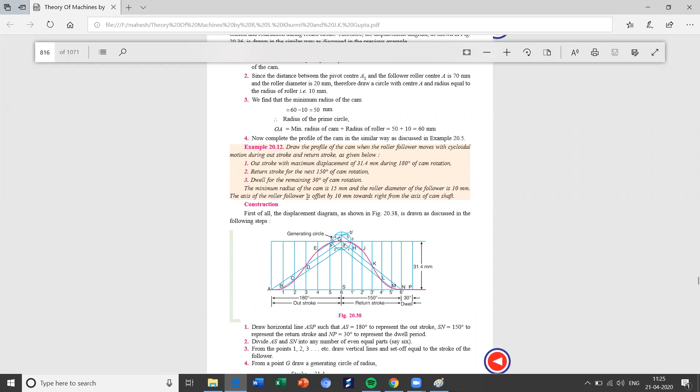Yes sir. Okay, so here you can see the outstroke is maximum displacement. It is given 180 degree. Return stroke is 150 degree. So dwell is 30 degree. Likewise they have mentioned it here. You can see the various problems. You can see here, the same problem.

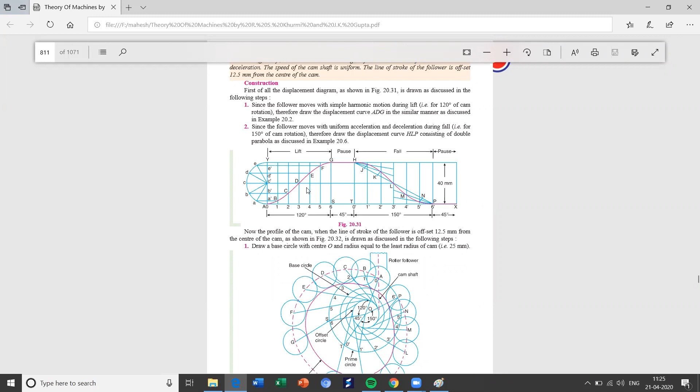This is the problem, but only I have changed it. Same problem, you can see the simple harmonic motion and UARM. I have changed my angles because I have taken one problem from the question paper, previous question paper. So here also they have mentioned: angle of lift is 120 degree and angle of fall is 150 degree.

And lift of the follower is 40 mm. Such kind of thing they have given. Here you can see number of pauses are 2, of equal interval between motions. So likewise, they will not be mentioning how much is the dwell angle.

See here, you have to count it first of all. Here it is given that angle of lift is 120 degree and angle of fall is 150 degree. So 120 and 150, it makes how much? It makes 270 degree. Out of 360 degree, how much is remaining?

60 and 30, it is 90 degree. 90 degree is remaining now. Now what it is saying: number of pauses are 2. So 2 pauses are there, correct? Of equal interval between motion. So whatever pauses they take for a certain angle, it will be divided in 2.

So what are those? We already know 90 degrees remaining, so you have to divide it in equal number, that is 45 and 45. So here you can see the 45 first dwell period and the second dwell period is 45. These you have to make out. It will not be mentioned in the problem, they will just be giving the sentences. You have to make out how it works.

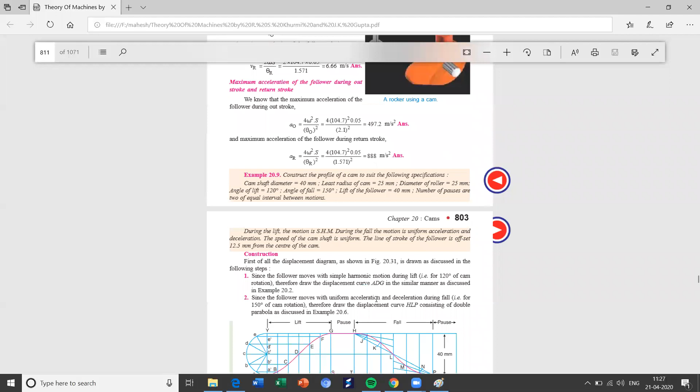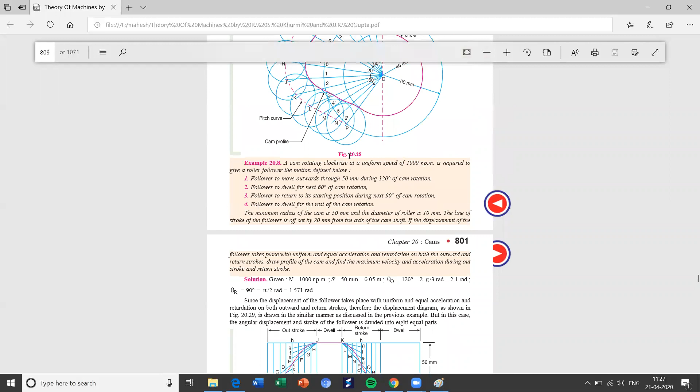Next, you can see here again in this problem: outward 120 degree, again 60 degree, this is 90 degree. See here it is given clearly that 60 degree dwell for the middle portion, it has been mentioned. The next one again 90 degree, it has been mentioned, and the follower to dwell for the rest of the cam rotation, here also it is mentioned.

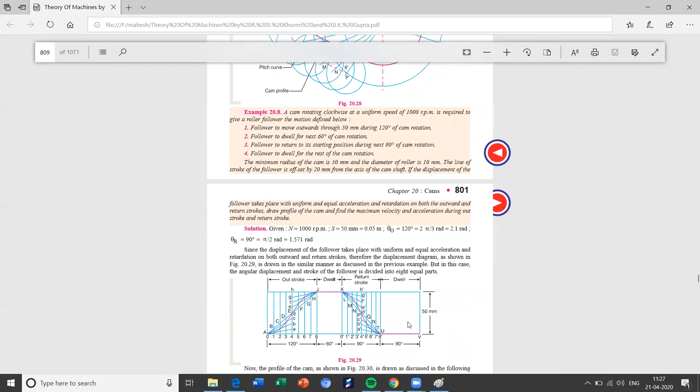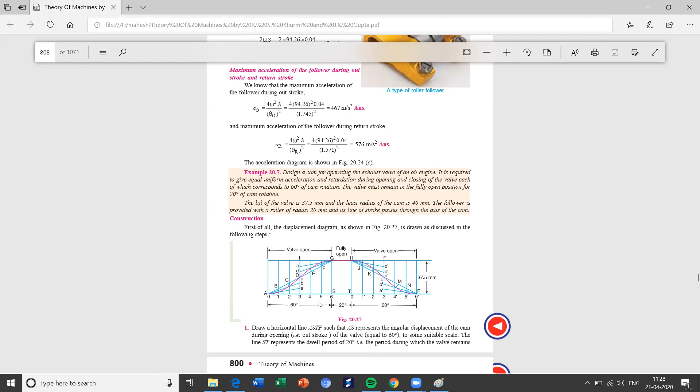So here already it has been mentioned that for opening and closing, each corresponds to 60. So 60 plus 60 is 120, and the dwell period they have mentioned as fully open position, that is 20 degree. So now, next one, you can see this problem. There are various kinds of problems.

So particularly what I mean to say, here you can see I have taken this problem in the question, but they have mentioned that... sorry. So particularly what they have mentioned here in the problem is that the lift or the angle of rotation, they have precisely mentioned angle of

outstroke. It is given as 1 divided by 4, 1 divided by 4th revolution. They have given it like this, they have mentioned. And here they have given the next thing. But I'll just clear this. Now if they have given it like this, 1 divided by 4, revolution of 1 divided by 4, that is nothing but, or they will be giving, is pi divided by 2.

But if they told pi divided by 2, you will be able to make out. So how they will do it, it is nothing but 1 divided by 4.

If they give 1 divided by 4, what you have to do is nothing but the full cam rotation takes place for 360 degrees. So it is nothing but 360 divided by 4, which will give you 90 degrees.

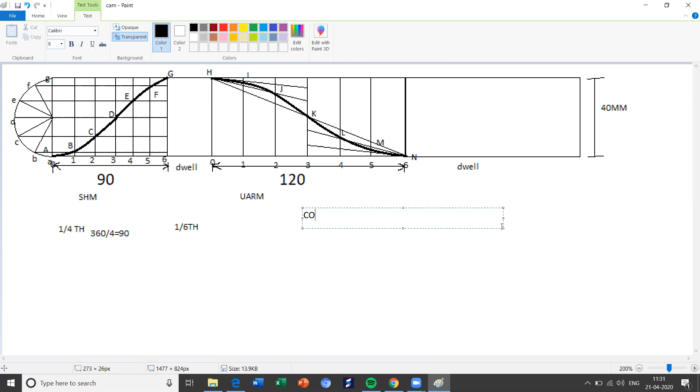Every time whatever questions we have solved, the direction of rotation is given as clockwise. Now here is the trick. Whatever direction we have solved till now is clockwise. So now if clockwise is given in the problem, but in what way do we actually solve it? We have to go anti-clockwise.

As you can see in the previous problems, we have solved it in an anti-clockwise direction, correct? I'll just show it once again here. You can see here 0, 1, 2, 3, 4, 5, 6, so we are coming like this, from the right side to the left side. That means this is anti-clockwise we are drawing.

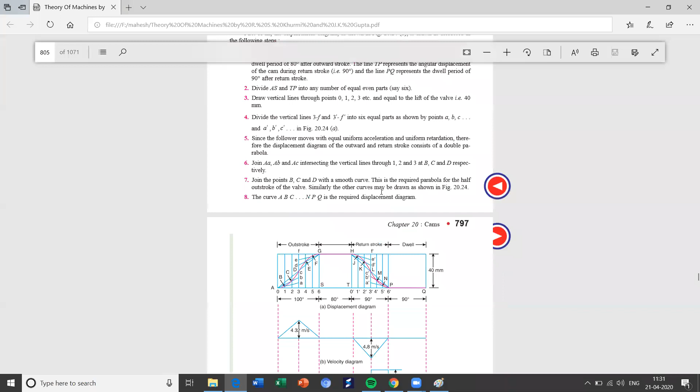But the problem states here, it may be mentioned, 'rotating clockwise at a uniform speed.' In every problem they'll mention clockwise. So just remember, if clockwise is given, you have to draw like this, following the same procedure. That means it is actually anti-clockwise we are drawing, but we have to follow that rule.

But here now, I have taken one question paper from 2008, and again in the question paper of 2012 or 11, something, I don't remember properly. In those question papers, this anti-clockwise question has arisen 2 to 3 times.

So now I will make this question as anti-clockwise. We have to solve it by anti-clockwise, meaning already in the problem it is given, it has been mentioned, you can see here in the problem it says anti-clockwise. So what do we have to draw? If it is mentioned as anti-clockwise, then we have to draw it in a clockwise manner.

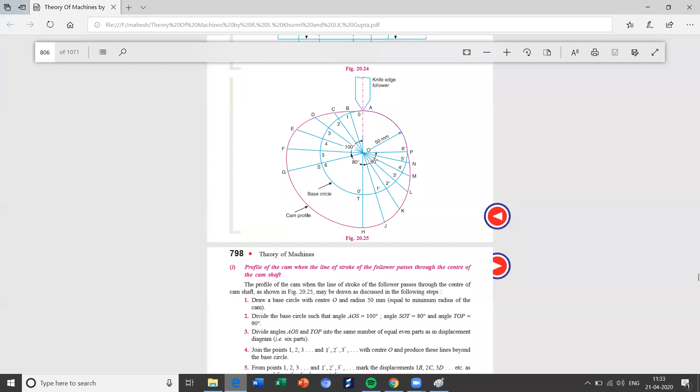So now how about the clockwise manner? I have already downloaded one image so I can show you how it looks in the anti-clockwise case. Whatever the procedure is, as it is, you have to draw it. Only thing is there will be a small difference. I will let you know what that difference is.

It is nothing but, as you can see here, the profile will look like this. Are you able to see? Just see carefully. Guys, can you see this? Yes sir, yes sir, yes.

So what they have done here, they have started from this side. You can see here 1, 2, 3, 4, 5, 6. So what we used to do in the left side, now you have to start on the right side. So now you have to go from right side to left side. The procedure is the same as it is.

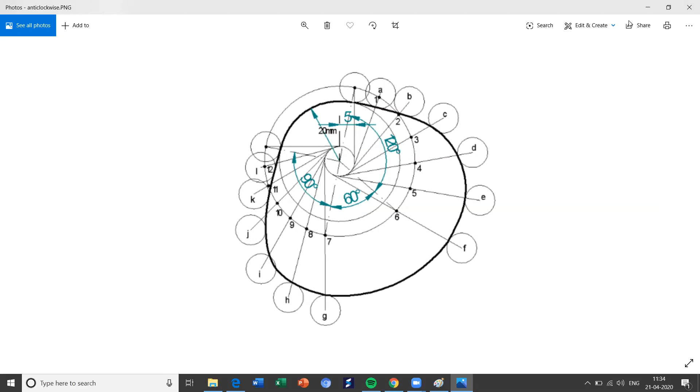So now I will make you aware with this problem, I will show you how it works. So if it is like this, then already a certain prime circle is given, suppose. Suppose it is a roller circle, or shall I do it with a knife edge? Which will be preferable for you people? You tell me.

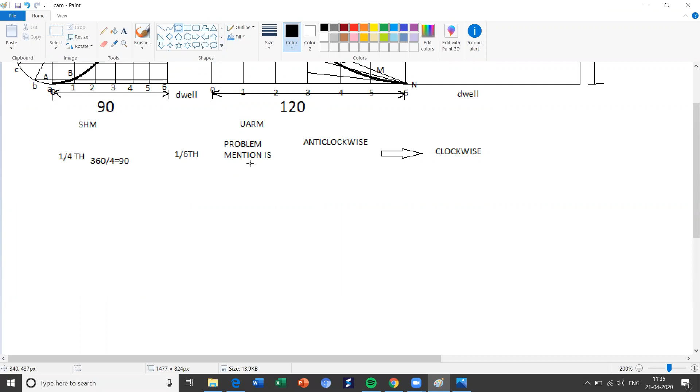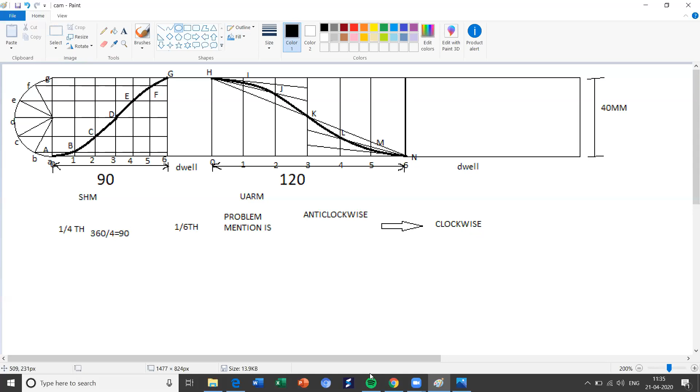Knife edge, okay we'll do it with knife edge. First you understand this: if the problem is mentioned in anti-clockwise, you have to read the problem very carefully. If it is clockwise, every time it is given as clockwise, no problem, we have solved with the anti-clockwise situation, because in the textbook, in the RS Khurmi book, the problem is given in clockwise direction, isn't it? I saw the question papers, and in those two or three times it has appeared, so because of that it's very important to know what is anti-clockwise and what is clockwise.

So I'll just start with whatever circle we're making here, I'll draw it. Yeah, so this is my circle.

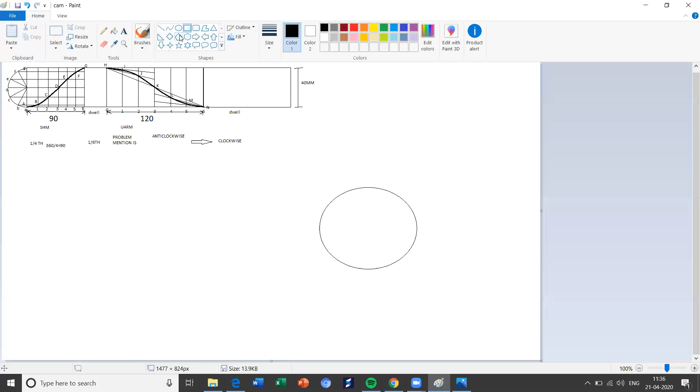So then what I'll do, I'll take here the knife edge and one center. Just center I'll take, and one knife edge point I'll draw. From here I'll take the knife edge, and as you can see it is located here, the knife edge point will be this one. So I'll be taking this point. Be careful, this is a very important problem.

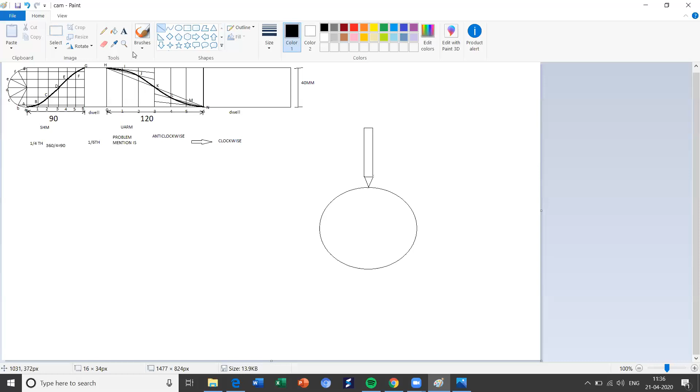So the next point here, this is my axis. So I'll just draw the axis from here. As you can see, I've drawn the axis, so this is my axis.

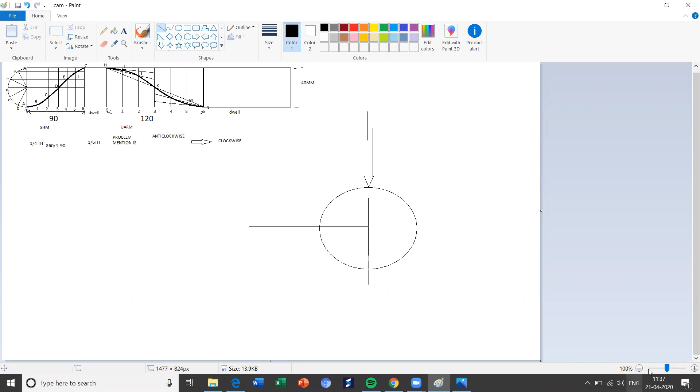From here, now the initial is 1/4, that is nothing but 90 degrees. It has been given in the problem as 1/4, that is nothing but 90 degrees. So here I'll take 90 degrees. Let me get rid of this. Correct, yeah, so this is my 90 degrees. I'll just mark this, or I think it's enough for you to know how it looks, 90 degrees. I'll zoom it, you can see. I'll write here with my hand, 90 degrees. First I'll take 90 degrees to show you better, and I'll mark this angle like this. Yeah, this is my 90 degrees.

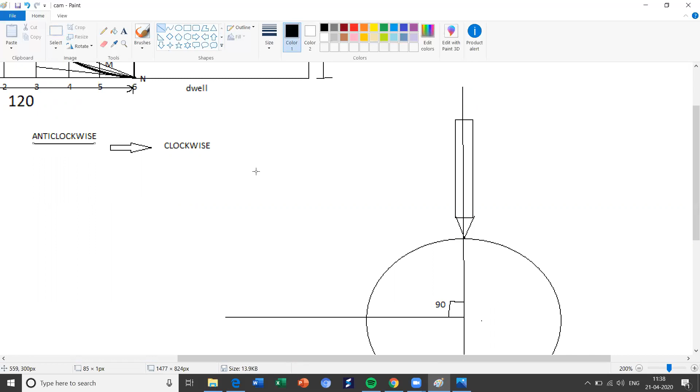So next, I have to make certain divisions. Now what I'm drawing here is what we used to draw as clockwise, but you can see here the problem is given as anti-clockwise. So anti-clockwise means, whatever I have drawn here as 90 degrees, that is for clockwise. But now in the problem, it has already mentioned that you have to draw it in anti-clockwise. Anti-clockwise means you have to go to that side.

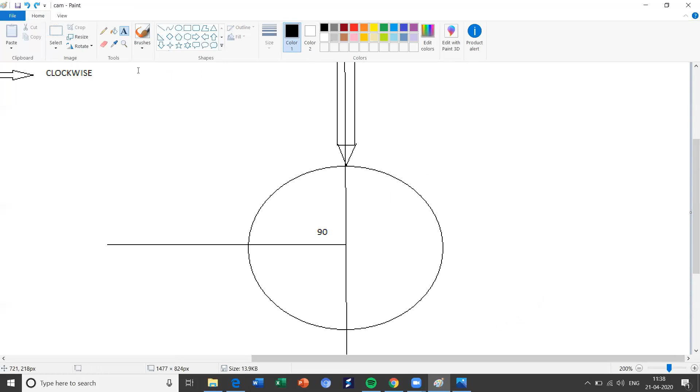So now I'll just rub this out, and I will start from here, marking 90 degrees here. I'll mark this as my 90 degrees. Yeah, here it will be fine, and see here it is 90 degrees. Now it has started for anti-clockwise.

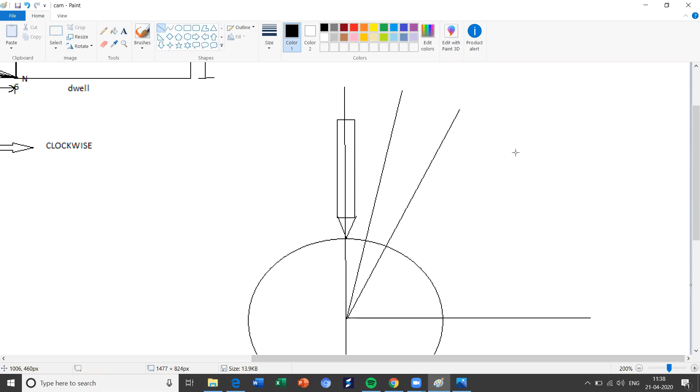So I'll be going on dividing these lines: 1, and then 2, you can see here, and then 3. So 3 divisions are made, and this is the 4th division, and this is the 5th division, and 6th division remaining. So these are my 6 divisions.

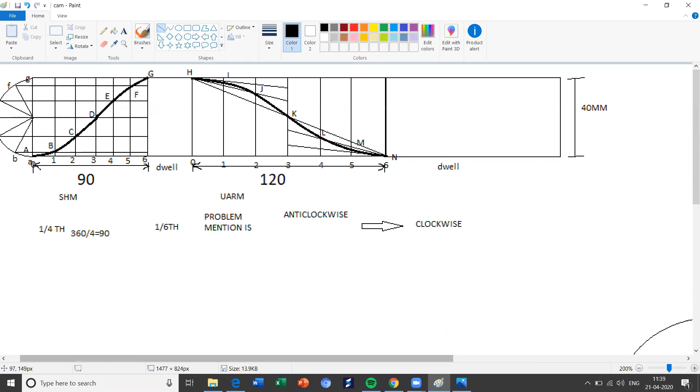Okay, so these are the points you can see here, I have marked here. So basically, the 1, 2, 3, whatever I have done here, those will be lying on this circle. Naming those points is also very important, so please be careful while naming. So on this circle, whatever points are meeting, I'll be naming those points: this as 0

and this as 1, so this as 2, this as 3, and so on. Fifth one, sorry, so this is the fifth one and this is the sixth one. So these are my 6 points.

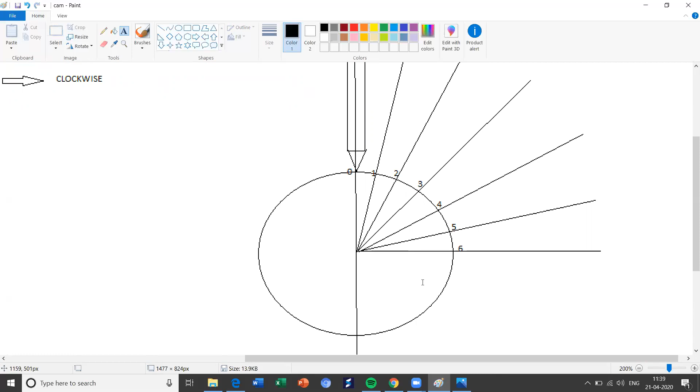So now here you can see some points, and I will mark this angle again. You can see I'll just mark this angle as 90 degrees. Yeah, it's 90 degrees. Okay, it's getting it in. So next, I'll just make it very clear here that it is 90 degrees, so it is

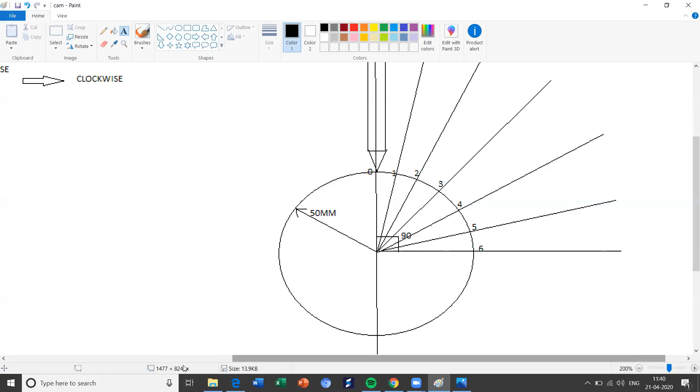visible for you. So now take a compass and keep the compass on point 1, because 0 and A both are matching here, so this will be my 0 as well as my A point. You can see here. So now, for 1 and B, you have to take that distance with a compass and keep it on the first point, point 1.

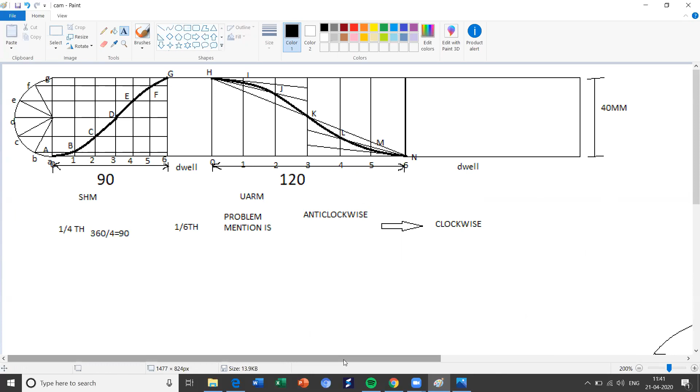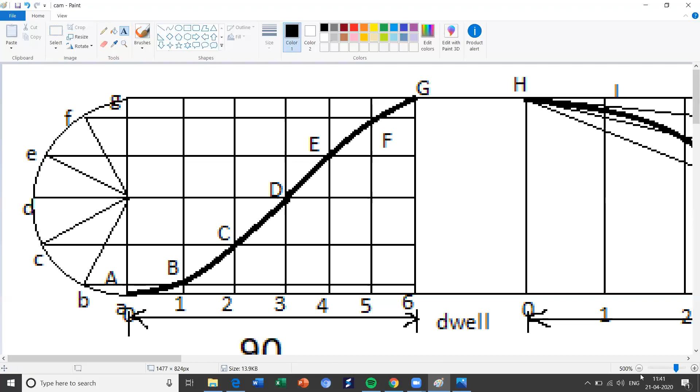Here the distance looks very minor, but if you zoom in, you can feel the distance. You can see, I'm just zooming it. So just keep the compass on point number 1, take the distance up to B, and that distance you have to transfer here onto this one.

So I'll be taking an arc here, and I'll see that it has been taken here. I'll just keep it over here and mark it like this. Okay, that's better. Again, on the second one I'll be keeping B and C. Sorry, 2 and C, then 3 and D, 4. So go on doing this, and for 6 the point will be G. This will be G point.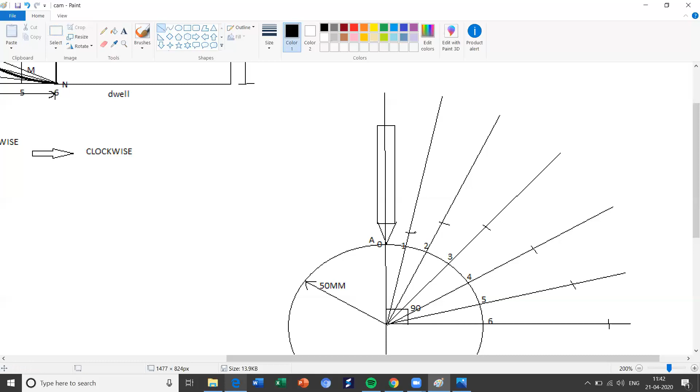So now from this point, whatever point we got, just tell me what you have to do. This is not a roller follower, and this is not an offset. So directly you have to draw the profile. From whatever points we are getting, from those points we'll be drawing here.

So again from here, once this is done, take a gap. I have not mentioned how much the gap is. Just consider it as 30 degrees. Okay, I'll just say it as 30 degrees. And the rest I'll just divide, you can see, and then we'll name it.

First one, second gap, and this is the third one. This is my fourth one. You can see here I have taken one more line. It is not crossing the axis, and this is my next point, and this one is my last point. So 1, 2, 3, 4, 5, 6 divisions are there. When 6 divisions are there, again I am taking these points. From here, again I'll be starting the cutting.

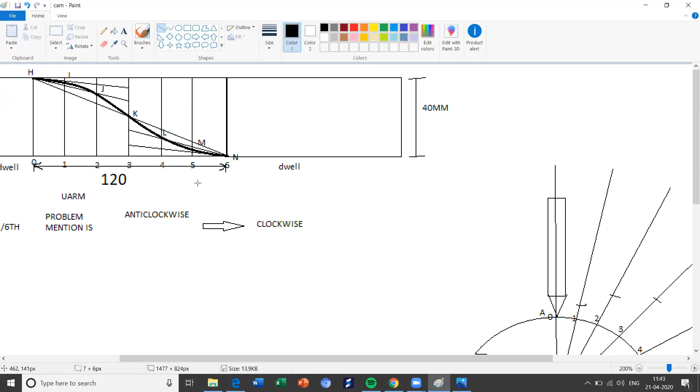Now here I'll be taking these points: from 0 to H, from 1 to I, from 2 to J, from 3 to K, 4 to L, 5 to M, 6 to N. So I'll mark these points very fast. You can see here like this. On each line I'll be marking those points. Just transfer these points here, and the last point will be touching here.

I have not mentioned it here. Yeah, it will be touching here, and I'll be showing it here like this. I will just keep this. The last point will be matching. You can see here the last point will be touching here. So this point I'll just mark here. The last point will be here. Then the next one goes on like this. I'll just increase it. So you can see, that's better.

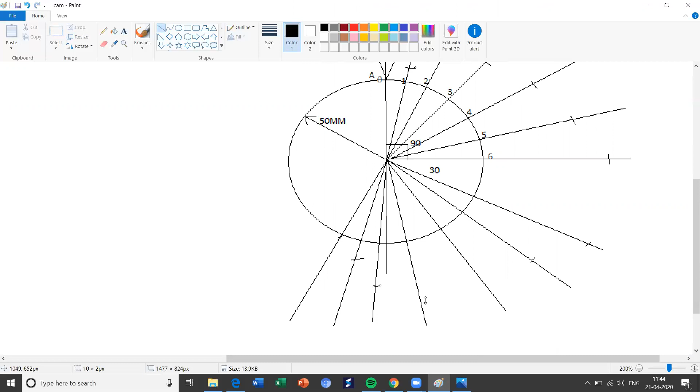Now, which are those points? I'll just name these points. I'll mark them very fast. This is B. This point is C. This point is D, E, F, G. Oh, sorry, so this is G. And this is H again. I. This is J. This is K. L. M. And this is my last point, that is N, which will be matching up to this.

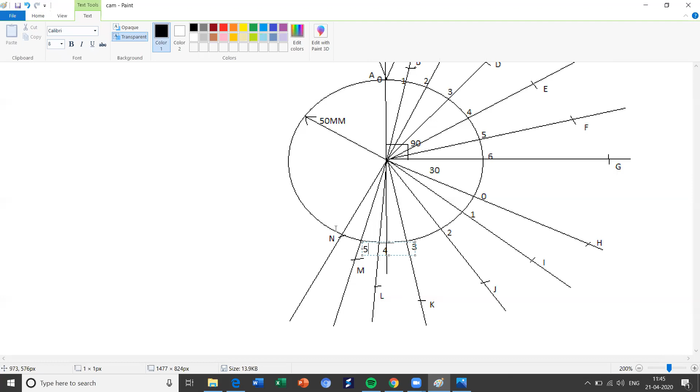So now again from here I'll be starting my numbers. You can see N is 6. So again I'll be marking those points here. This is 0. It's 1. It is 2. This is 3. This is 4. This is 5. And this last point is my 6 point.

So once this is done, now what you have to do? You have to take a freehand sketch and draw the freehand sketch over here. So just go on. You can see I'll just make these points dark. You can see here I'm just joining them.

Okay, you can see I'm just joining this, or else from this point freehand you can draw like this also. So just see what I'm doing here. I'm just touching these points. See here. So I'm just joining this point. It won't come properly, but I'm just trying to do it. You see, just try to join these points, again from here.

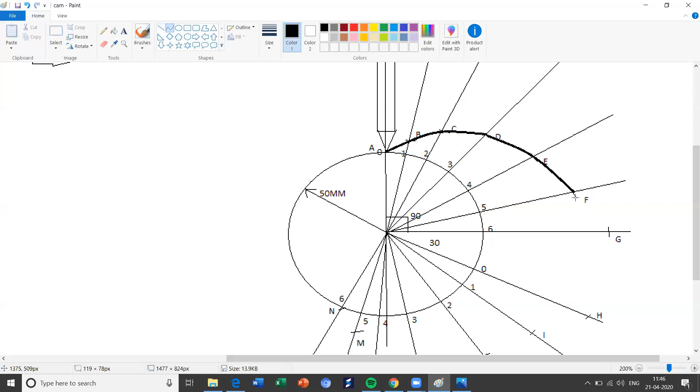See, from D to E, you can see. Just try to join these points. As you can see, I have joined it from here also. So take a free hand and join this curve. So here also I'll be joining those points, which are very useful. Or else I'll go on joining one by one because the curve is very small.

So I'll be doing C. I'm just joining this. So actually this should be outside. I have not marked it properly, so you can understand it. I will just name this, so that the curve is proper. You can see here, this is my eye point. This is not my eye point.

And then next this one, in the arc you can see here. From here again I'm starting joining here. So by free hand you can draw like this. And next one you have to just go on completing, touch this last point. So likewise. Then you have to dark this circle also like this. You can see here, this circle also you have to dark.

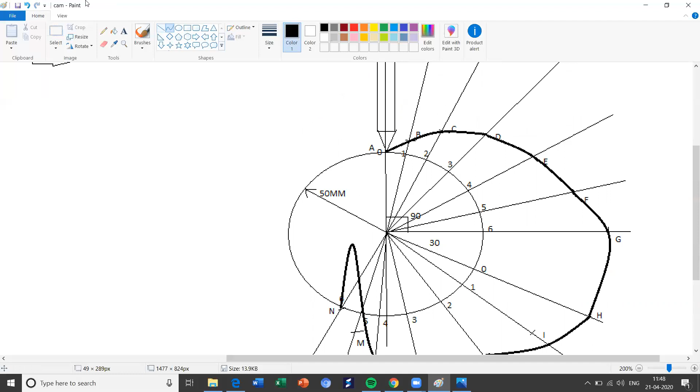So even I'll just show this. Once again I'll draw this. So your profile has been completed. Once this is done, whatever the rest portion of the circle is there, that also you should make it dark like this. Take a pencil and just go on drawing this like this.

I don't know how proper it will come, but I'll try my best because my cursor is not moving properly. You can see here. Yes, that's it. So I'll just rub this. You can see here the proper circle has been drawn. Okay, so I'll just minimize this now.

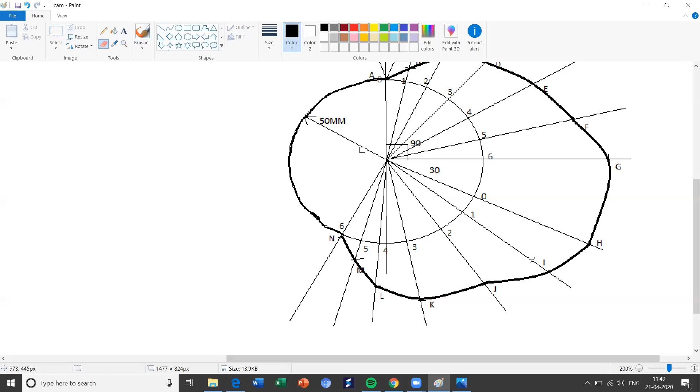So you can see here this is nothing but a knife edge follower for anti-clockwise direction. The problem is for anti-clockwise. I'll just put it here: anti-clockwise direction, knife edge follower. I'll just make it bigger. So this is an anti-clockwise direction knife edge follower. So if they ask about the anti-clockwise, you have to draw in this way.

And here, sometimes they'll not give direct degrees like 90. They will tell you like this: the cam is moving 1/4 revolution, then the dwell is for 1/6 revolution. If they give it like this, you should divide 360 by 4, that is 90 degrees, and if it's 1/6, it is 60 degrees. So you have to take it like this.

So here I'll just mark this as 120 degrees. Yeah, this is 120. So this completes my cam profiles. Each and every point I have covered.

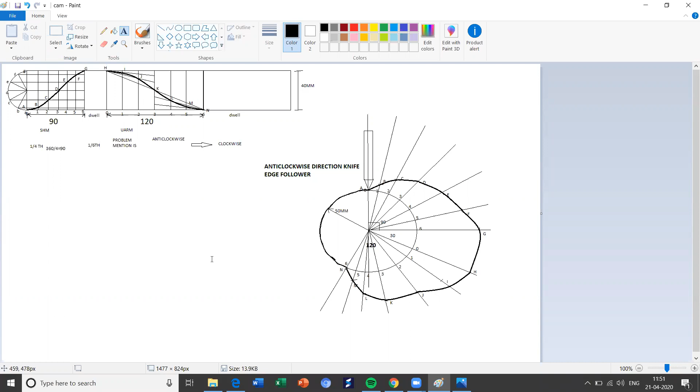If you still have any difficulty regarding this, please let me know and come up with questions, because in the textbook this anti-clockwise direction has not been mentioned, and this kind of 1/4 revolution problem has not been there. I have referred to some question papers, and from those these questions have arisen. If there is any question regarding this, please let me know.